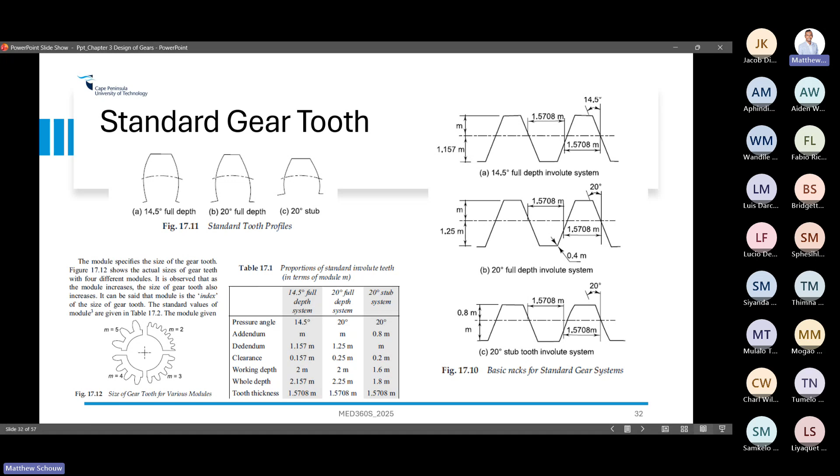And again, a way to quickly look at this from a practical sense in terms of modules - what you can see here is 4 sections of gears, for 4 different gears with 4 different modules. What you can observe is that as the module increases, the size of the tooth also increases. If you look at the equation, does that make sense? As the module increases, the amount of teeth should decrease - sorry, that's the amount of teeth. This is the size of the teeth. So if you increase the module, the size of the teeth gets less - wait, if you decrease your module, the size of the teeth would be more. So that's another way of looking at it. But the key word is module - module takes a lot into account in terms of the geometric proportions for gearing systems. Anyway, I just thought I'd quickly share this with you so it was done.

Continuing with the lecture, this is from Shigley. I think where I actually want to start is over here, let me go back. There's something called dynamic effects, and we start talking about the forces and these dynamic effects.

There are basically additional forces arising within the gear when they are meshing. These include a few things: errors in the tooth profile, the inertia of the rotating masses, the deflection of the teeth, inaccuracy in the tooth profile, and also...

What is key there as well, and I wanted to read this text, is that when a pair of gears is driven at moderate or high speed and noise is generated, it presents dynamic effects. And that's the dynamic effects I mentioned before. It says one of the earliest efforts to account for an increase in load due to velocity employed a number of gears of the same size, material, and strength. Several of these gears were tested to destruction by meshing them, loading them at zero velocity.

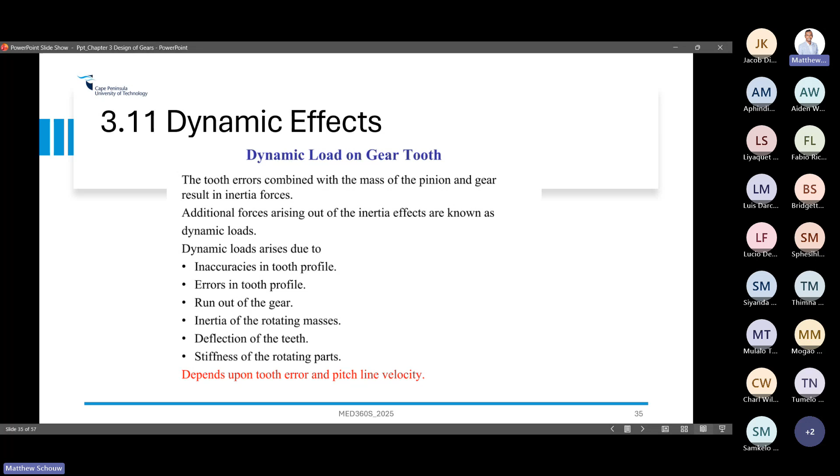So, for us to quantify these dynamic effects, all we're doing is applying some kind of additional factor based on the pitch line velocity. You notice there it's FD equals something times Ft, and there's a few for a different range of speeds.

Again, tooth inaccuracies and deflections - it's another factor which you're going to add. But it's also important, and you'll see why - we'll return to it shortly. Just remember: the tangential load times some other factor will result in some dynamic load, which we'll use as a formal assessment to determine certain things with the gear.

But let's move on. So in terms of gear tooth failure, obviously we're designing, and we need to ensure that our gear has structural integrity, right?

In terms of making sure our gear tooth doesn't fail - I mean, you might work in a company where this happens, or sometimes you're going to buy this off the shelf, but anyway, here's the awareness.

Gear teeth typically fail in two ways: one by bending failure, one by wear or surface destruction. The other one is breaking the tooth. And obviously with wear, there are a few factors involved. Do you have to know all of this? No. What's key is understanding it falls particularly into two different ways.

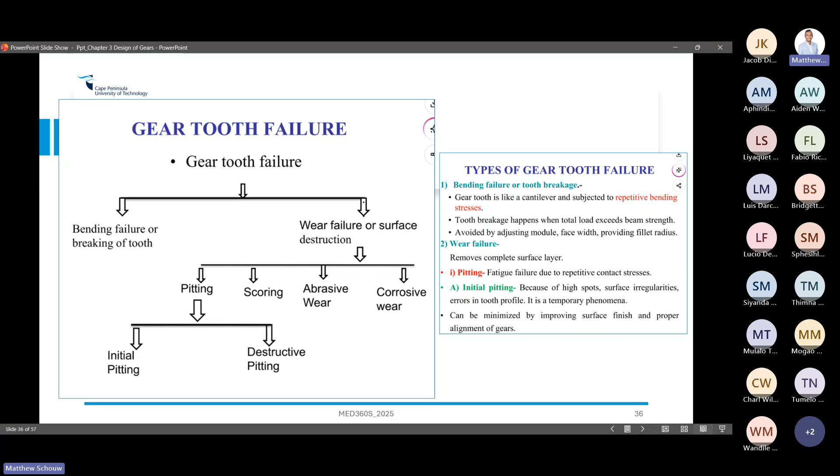So we're going to design our gear to check if bending is good and if wear is good, and I'll take you through that procedure. But let's begin with the Lewis formula.

So the Lewis formula is basically the underlying fundamental concept for this. Basically, it's applying the bending equation to a gear tooth. You can see he assumes it will be a cantilever with a force on the end, does some mathematics, and then applies some assumptions as well.

And we end up with the bending stress within the tooth equal to 6 times Ft times L divided by B times T squared. So that's the first thing - we can actually compute the bending stress within the tooth. Obviously it's all there, so we can determine whether it's going to break or not. And I'm sure you're familiar with M times Y over I - it's a strength formula in bending.

Also, with that, it's kind of okay. I'm just going off the slides of Mr. Chipangu, but what should have been shown is that from your Lewis equation, you can actually remodify this in terms of FB, and we can then call this your bending load. And then you notice that there are a few factors to look at.

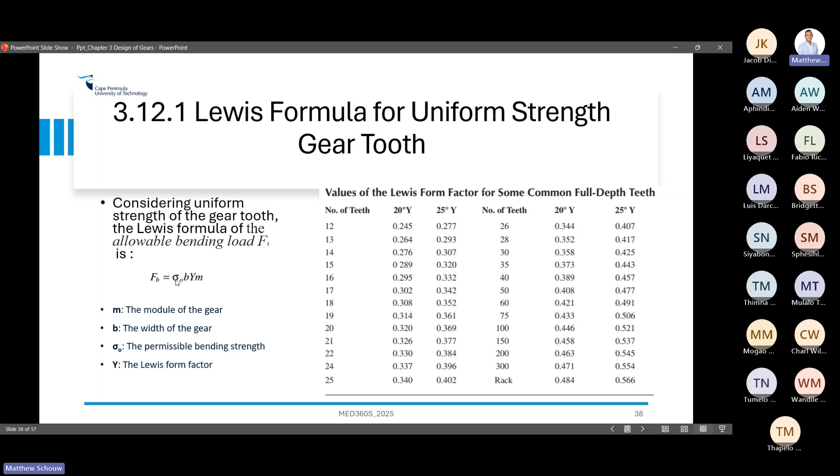When you look at your Lewis form factor, that's to do with the number of teeth and the pressure angle; this is the Y value. Whatever number of teeth you have, whatever pressure angle you have, you choose that Y form factor. Your module is your module, B is your width of the tooth. Then you've got your permissible bending strength, and that comes from this table over here.

And what's main there is that when we are looking at basic gear performance, the main criteria you're going to be using is that your dynamic load should not exceed the load capacity. So we are comparing two things: FB, as mentioned just before, and your dynamic load FD. We compare those two to determine whether the gear is suitable or not.

This also serves as the basis for something called the AGMA approach, which is like the standard for designing gears. And that's what I'd like to at least get through with spur gears. It's not tough, just a lot of stuff there. But anyway, I'll come back to that. It takes us to the next section, which is this method over here. It's basically the same, just a lot of factors we've got to use.

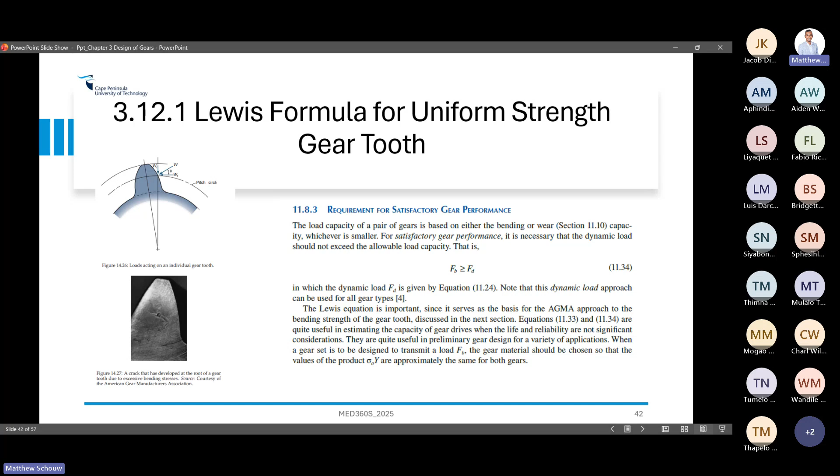But what I'm going to do after this is we're going to do Lewis, and we're going to solve this example. And then afterwards, we're going to do wear, go through this, and solve that example. That's today's agenda. After that, we will look at the AGMA method and go through that as well. But anyway, let's revert back.

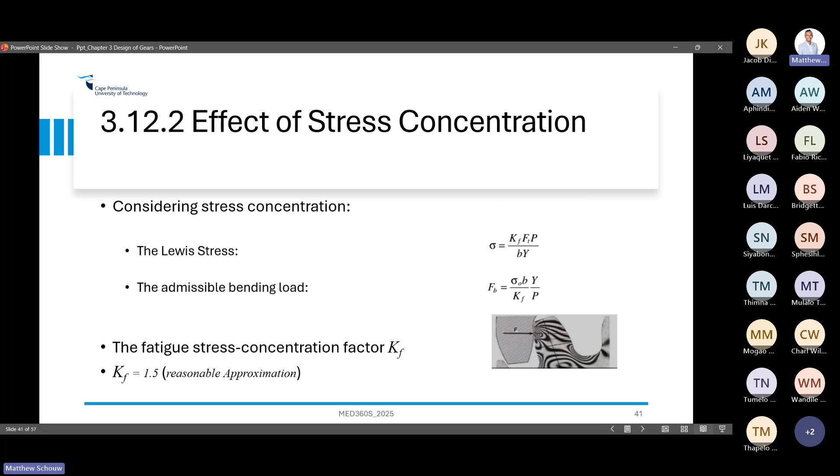So key thing here: we are looking at this here. We need to find FB, we need to find FD. But let's tackle this problem here. Is that okay? Are there any questions before I proceed? You can just say no, yes, following, before I move on.

Siyabonga, Mogao, Tumi. Okay. Cool.

Yeah, so let's begin with that example. You can follow from the textbook as well, it's in the textbook. And once I'm done, I'll show you what the exam level is. If you can do that, you'll be sorted. So it combines a bit of forces and a bit of gears. I'm just preparing the question here, and we'll begin.

Okay, let me just place it nicely. Yeah. Okay. Cool. I believe I wasn't sharing. All right, here we go.

So again, the whole purpose of this is to determine FB, and it's again related to this dynamic force. Okay.

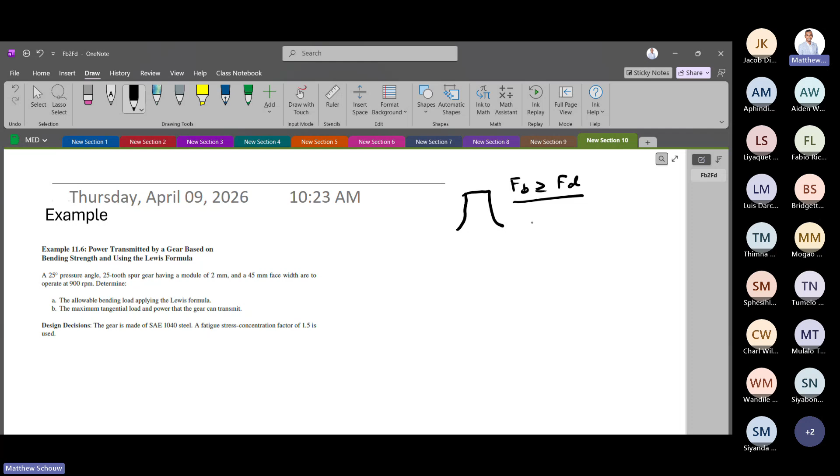Anyway, so we have a pressure angle of 25 degrees, a 25 tooth spur gear, having a module of 2 millimeters, and we have a 45 millimeter face width to operate at 900 RPM. What they want is FB, which is your bending load, and then they want the maximum tangential load and power that the gear can transmit. I'll talk about that afterwards.

The gear is made out of that steel, and it has a fatigue stress concentration factor of 1.5. Luckily, this is typically given. So let me take you through the process. The formula to begin is fairly simple. Your FB equals stress zero times B times Y times M.

I'll just make a note over here for you. Y and stress zero, the allowable bending stress, are from tables, so you're gonna have to pull that from a table. There's something I must tell you with this formula: do not worry about orders of magnitude, and you'll see what I mean. It's kind of like a direct plug and play. I've not introspected this formula 100% myself, but I trust what they're saying.

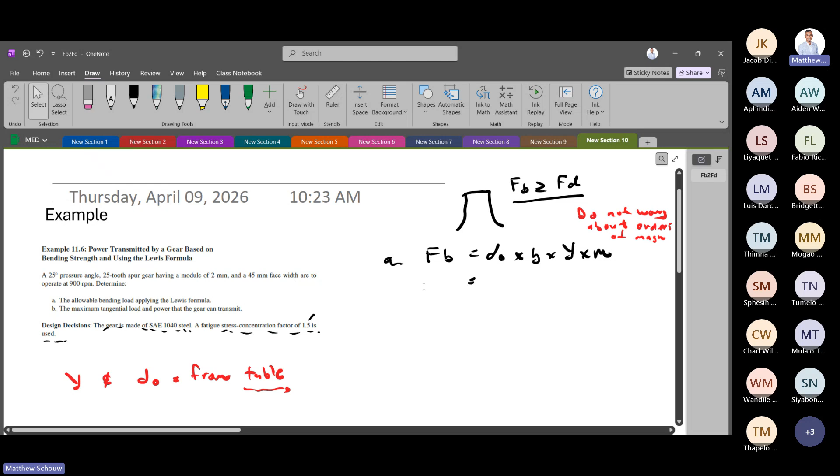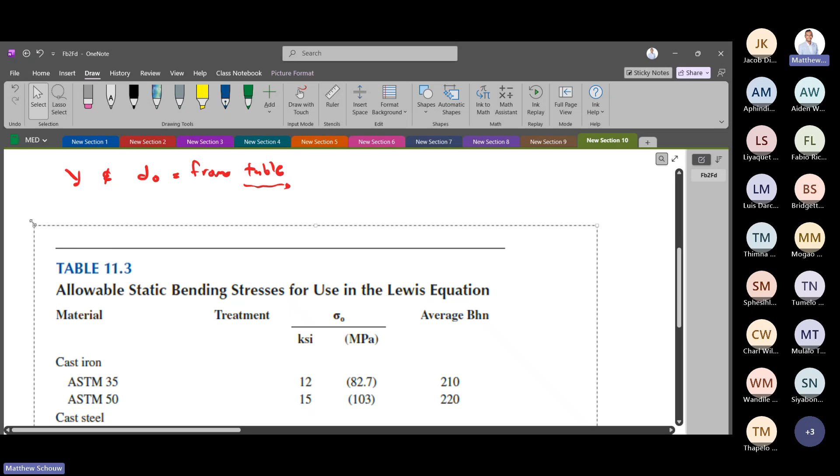So let's get our Y and our stress zero from tables. Let me provide the table for you. Let's start with stress zero, which is your allowable bending stress of the tooth. Engineering has come a long way for you to just pull a value from a table. This is table 11.3. Super simple. So can you guys determine what is my allowable static bending stress?

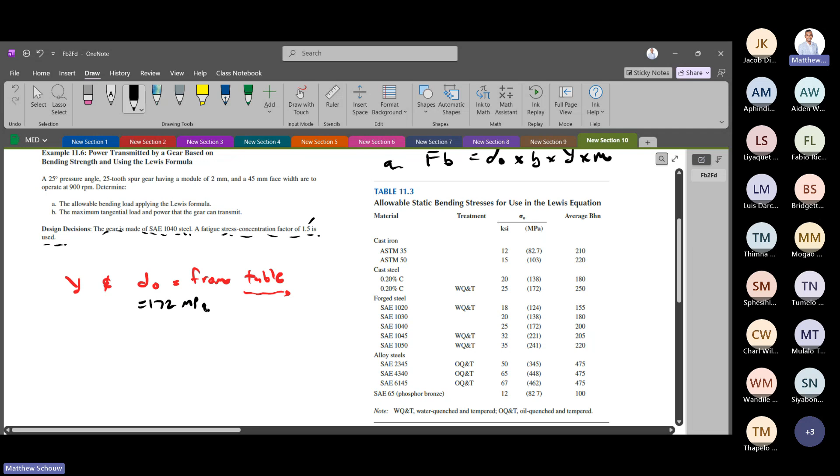We're dealing with the SAE 1040 steel. So can you choose which one over here and give my value? You can just shout out. 172 megapascals, I appreciate that. So that's going to be 172 MPa. Straightforward, right? Then we go to the next table to pull up a Y.

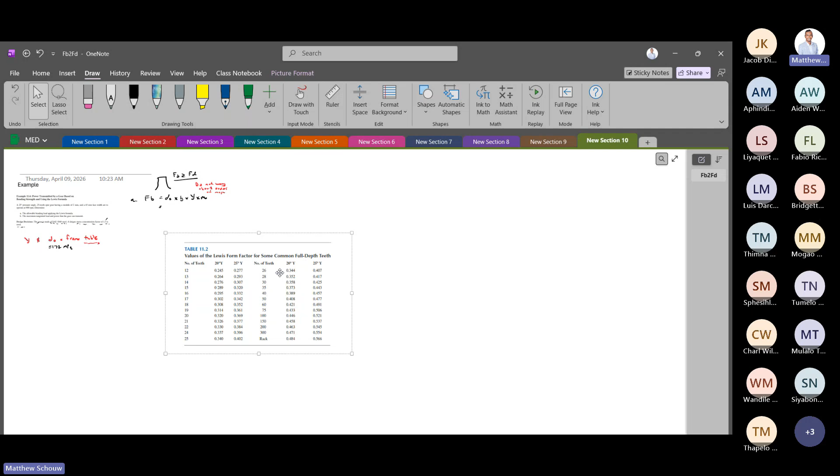This is the Lewis form factor, to do with the stress concentration thing. Just paste that over here. Okay, cool, my mouse is here. If you can see it, then you can obviously just tell me. Just want to get my notebook here. What is that value? Can someone tell me that value, please?

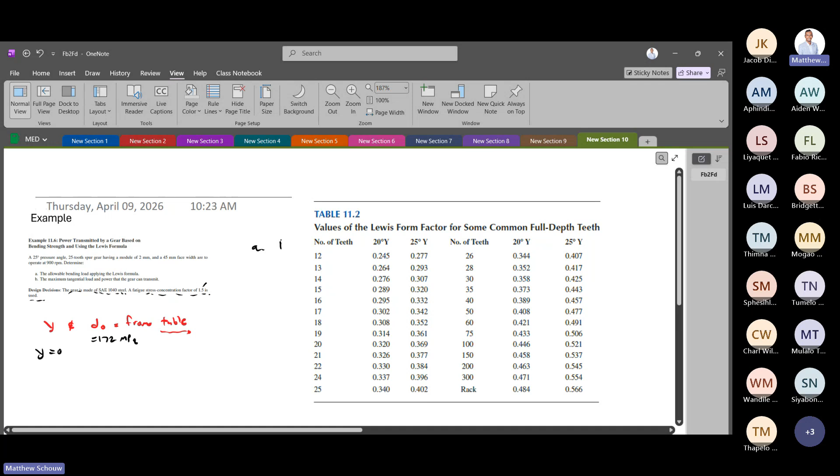I think you have to scroll down a bit. Okay, cool, 25 teeth. So we had 25 degrees, this one over here, right? I think it's 0.402. 0.402, perfect.

The one thing I need to add, which I'm realizing with this formula, is this over here. It's actually equation 11.3, for your stress concentration. So this was modified. It's the same formula, but now we have it divided by KF.

And guys, remember the P, which is your diametral pitch, is inverse to the module. So don't be overwhelmed by that. 1/P is module, or inverse. I hope everyone is with me. That's the equation we're gonna use, because we are just accounting for that stress concentration factor. So you just substitute the values.

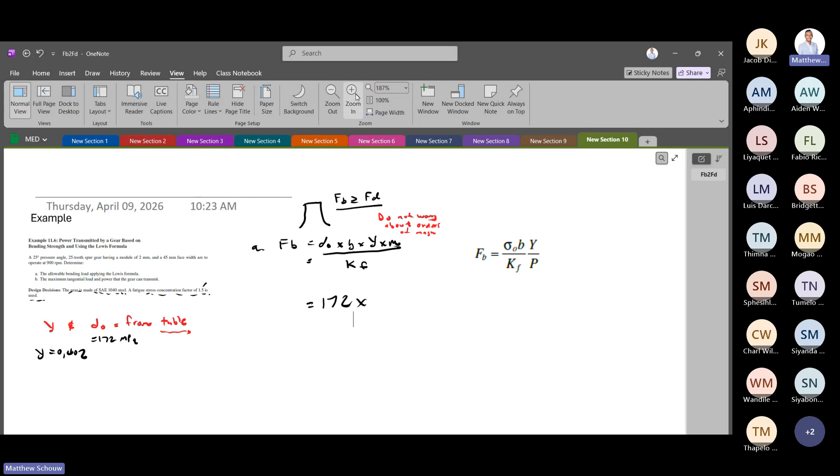You're gonna say 172, no orders of magnitude, times the width, which is 45, then Y, which was 0.402, times the module of 2, and we simply divide by the KF given of 1.5. This is typically standard, a good approximation to have.

And that's all. So no 10 to the power 6, no changing units to meters. You're just putting the values exactly like this. I'm not sure how that works, but yeah. So let's quickly get that bending force. You can just get it for me.

I got 4,148.64. Okay, Tony, you said 4,148? Oh, 4,000? 4,148. Okay. Point 64. Perfect. That's newtons, no? So that's the allowable bending load, guys. That's what it is. Okay. That's perfect. I hope everyone sees it's as straightforward as this.

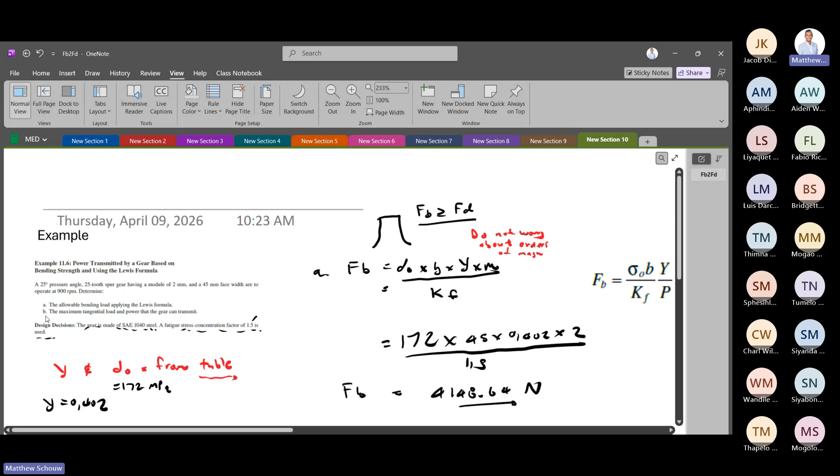So remember now we've got A, and now we need B, which is the maximum tangential load and power that the gear can transmit. So that's B. So we need FT. Now, unfortunately, we don't have a meshing system where we can find FT depending on the way it's rotating and our radial load. We have none of that information here, okay?

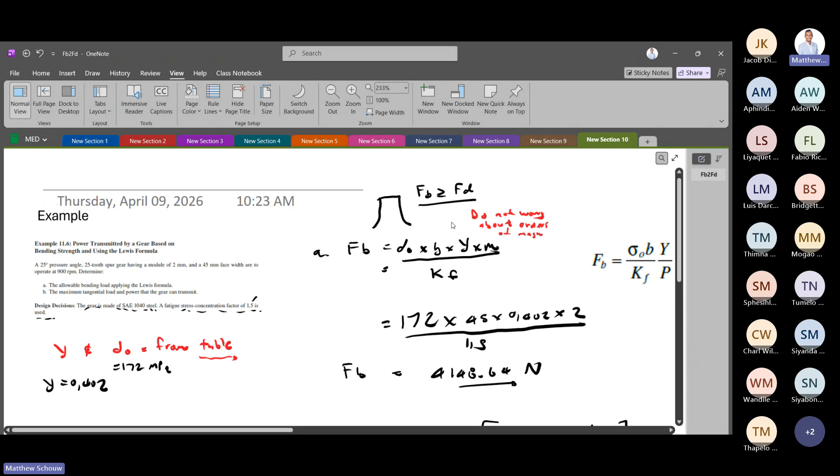So what they're saying in this particular question is that they're making FB and FD equal, right? Because this is the limiting value. So what it basically means is that that's like the max value that FT could be anyway. Well, not the max, the minimum value, because FB can be way greater than FT. So all we have to do is set FB equal to FD. But now let's find FD, right?

So FD is equal to, and like I said, this is very important, your dynamic load or effect all depends on your pitch line velocity and your tangential load, right? Obviously, other factors. Let me just go to my slides. You need to first find the velocity. And then based on your velocity, you have to choose the right equation. So the first thing to do before we do FD is find V, okay? So let me erase my FD and let's find our V first.

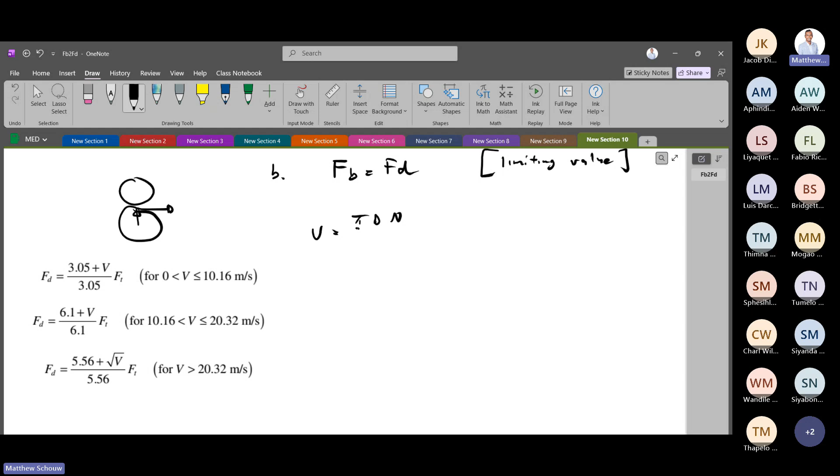Again, the procedures don't change for this thing. Straightforward. So V will be pi D n over 60. Colleagues, we have n, how do we find D? Who can tell me? What's the main value for gears? I mentioned it at the start of the lecture. The main geometric thing. How do we find D? We use m, the module, which is your diameter divided by number of teeth. Always remember that one. Very important. So let's quickly find D using this.

So you have the teeth number, and I believe you have the module as well. You guys can tell me what D is. Isn't it 50? Yeah, it's 50 exactly, nothing more, nothing less. It's 2 times 25. Once that is done, we say pi times 0.05, and our speed was 900 revs per minute, and you divide that by 60. And then you get...

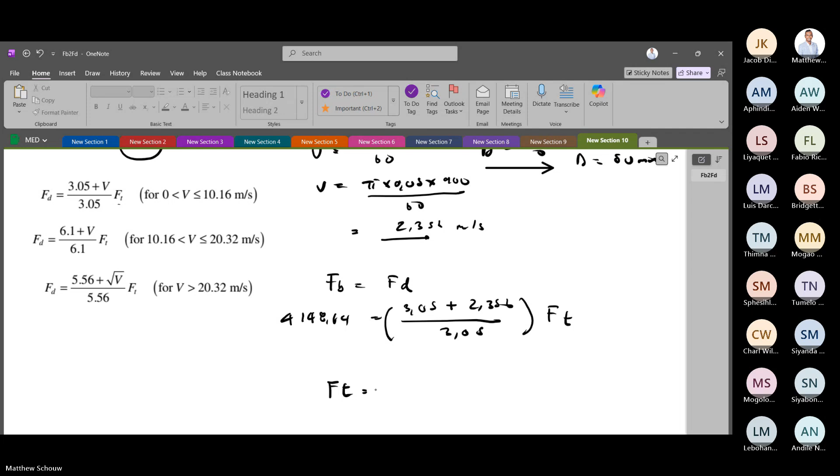Power should also be easy. Yeah. I got 2,340. Okay, just give me a second. You said 2,000? 340. 340, that's fine. 613. 613, no? Okay.

Once that is done, power, like we all know, should be Ft times V. And we can find that minimum power based on that force. So yeah, that's basically it. It's not too much, really. It's 5.51 kilowatts. Thank you, man. 5.51 kilowatts. So here we just established how much power that gear can transmit.

Which is amazing. So again, this is very, very specialized gear design. It's not a common thing anymore. Okay, so we've done that. I believe there's no questions. If there's any questions, ask, then we can move on quickly to the wear part. Any questions, guys, with this one?

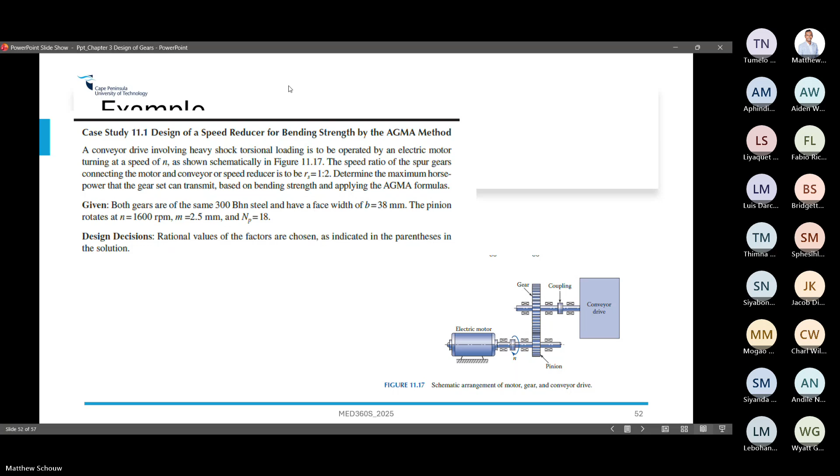Okay, let me come over here. Okay, cool. So let me just share my slides again. And now we're going to make a new section. We're going to move on to wear. So I'm obviously doing it a bit different from the book, but you understand it kind of flows better like this. I'm assuming you guys can see my slides. And we will come to it now.

So in this case, we're looking at something called wear, and instead of the Lewis formula, we're looking at the Buckingham formula, right? And what you're looking at when we design the gear is basically surface failure of the gear, one of the other modes of failure which you're checking for. And what is important over here is the following.

The wear load would be equal to your pitch diameter times your width times something called Q, and then something called K. Once you have that, you then compare Fw to Fd again, just like we did before. So it's exactly the same type of thinking as the previous one, but now I'm just looking for wear. Cool. So how do we get this value?

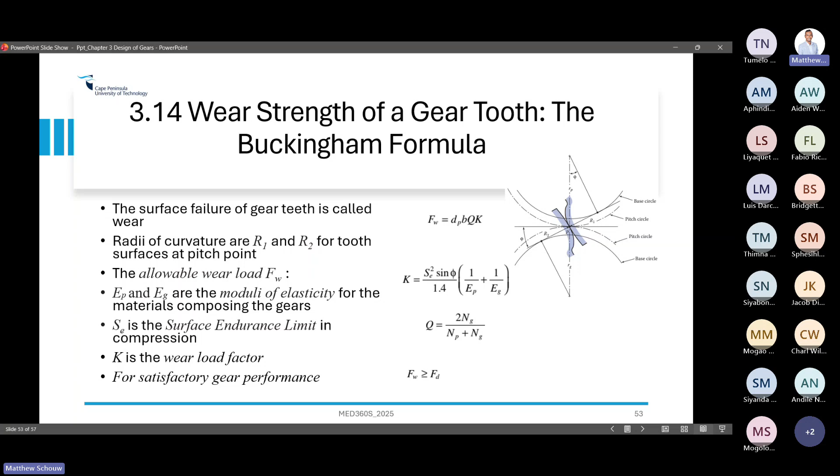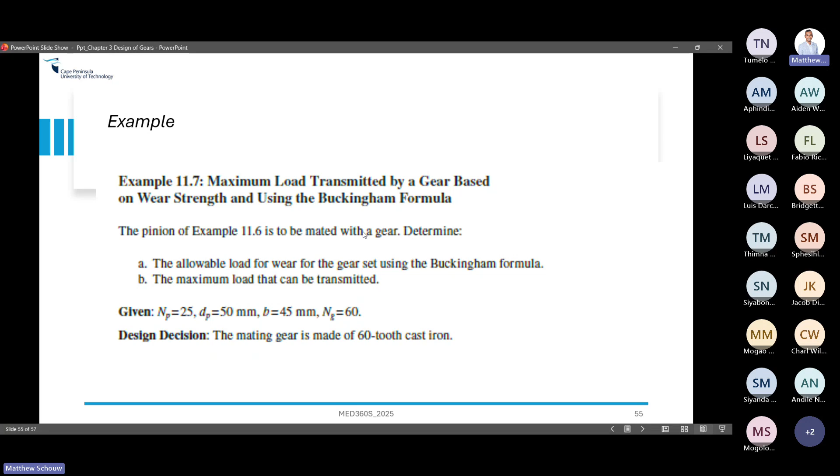What we're going to do now is check on that pinion in the previous example. We're going to do the allowable wear load using the Buckingham formula, and then we're also going to do the maximum load transmitted. So we do exactly the same as before, just for this now. Cool. So I'm going to go to OneNote again, and we're going to solve this one as well.

I hope everyone's following. What we're doing is just checking for wear and bending. It's just a lot of tables to pull from. Okay, cool. So here we are. We've got the previous one, and we now have to check for wear. Let me get the formula for you as well, so you can actually see it. I'm just going to copy it and paste it over here.

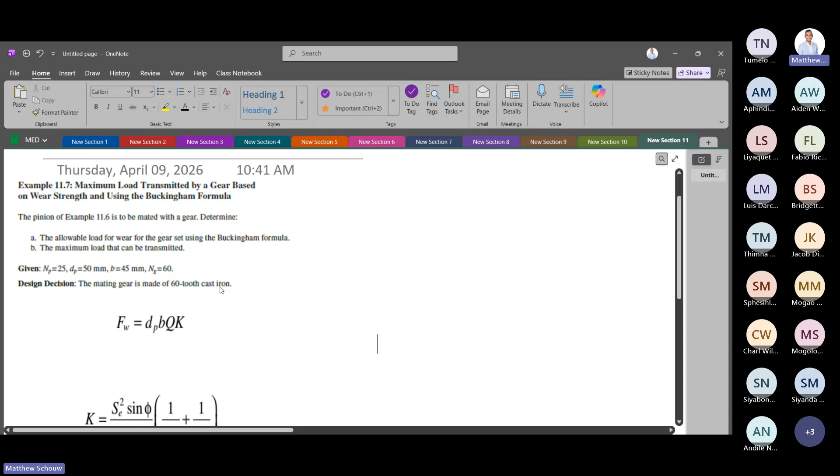So you can see it gives you Dp, which is the pinion. We have to check the pinion. And there's also a design decision for the mating gear: it's a 60-tooth cast iron. So obviously that is important. All right, so let's quickly try and solve this one. Fw, my wear load, equals Dp times b times Q and then K.

K is the only value we need to get from the table. Let me write that down for you. K from table, Q is equal to that over there. I believe everything is given to us. We have our diameter of pinion, we have our breadth of 45. We need to find Q and we need to find K.

Let's quickly compute Q using this formula over here. Let me write it down: Q is equal to 2Ng over NP plus Ng. Let's quickly get Q. It's some factor which I'm not sure about, man. I need to look at Shigley to give you a proper answer. Can I just get the Q value?

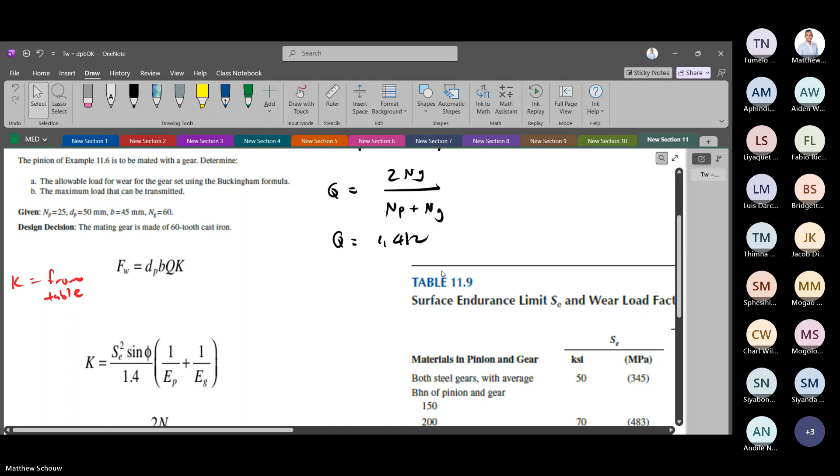is our form, the wear factor K, from the table. I'm just going to get it for you so you can see. Pressure angles, all of that's important here. So the 1.412, write that down properly. It's not tough, man. Never mind, just make it small. There's a lot, something different in this gear design from what I remembered, but anyway.

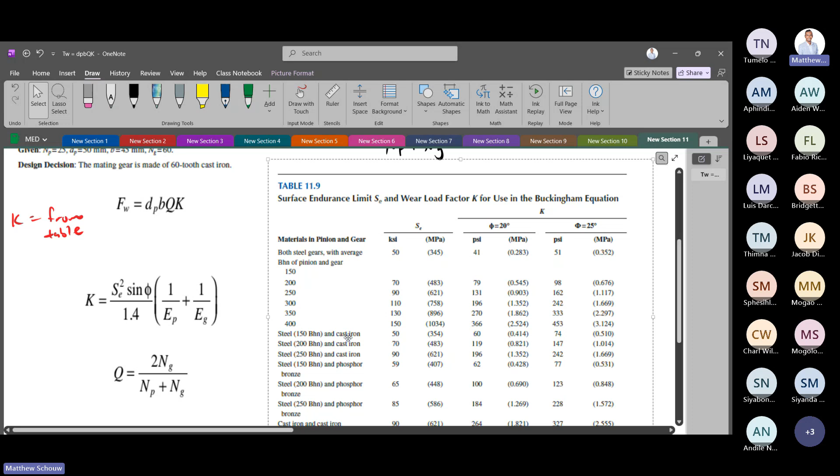So let's quickly have a look. K is from the table, and we are looking at a 60-tooth cast iron gear. Cast iron. So if you look at this, it's both the materials in the pinion and the gear. So what I'm understanding is what was a pinion and what was a gear? Let's have a look, colleagues. Let's remember now, pinion was SAE 1040 steel, okay, that's not there.

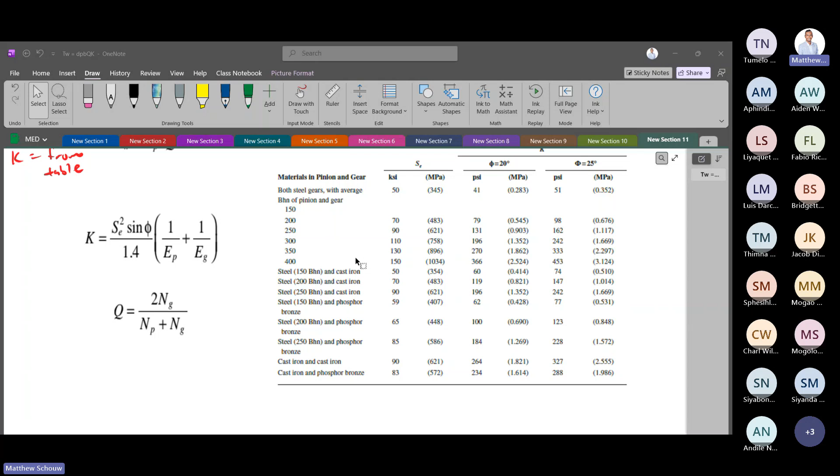But what was its hardness? What's SAE 1040 steel, guys? Let me have a look. I guess we need both, it kind of makes sense. I'm looking for the hardness. The hardness for that steel was 200. So SAE 1040 steel was 200.

So for pinion, it was 200 Brinell hardness. Not sure if you guys have ever done a hardness test before. I'm just going to show you now so you can see what I mean. Make a note that you're checking for both materials over here. I didn't want to mention it before, but I thought I'll show you now. So SAE 1040, the value there, average Brinell hardness of 200, can you see there?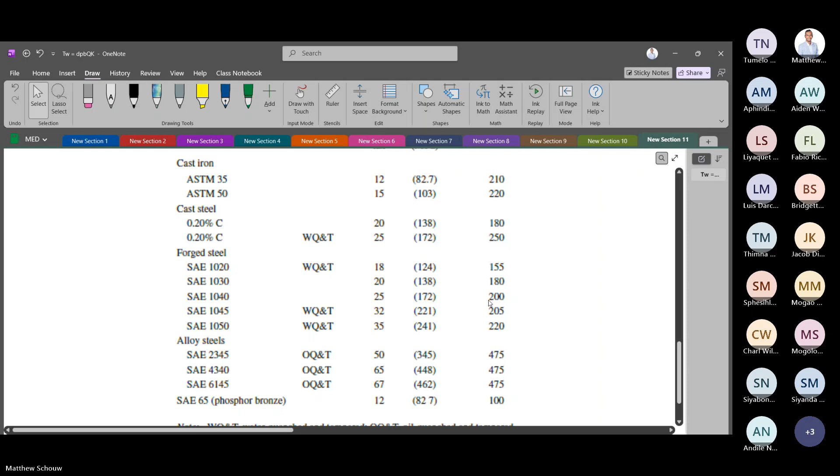Cool, so if that's the case, your steel is 200 and our gear was cast iron, right? And if that's the case, we can say our K factor for a 25-degree, can you guys see it there? Is 1.04, yeah, 1.014. Are you guys with me? If not, please tell me.

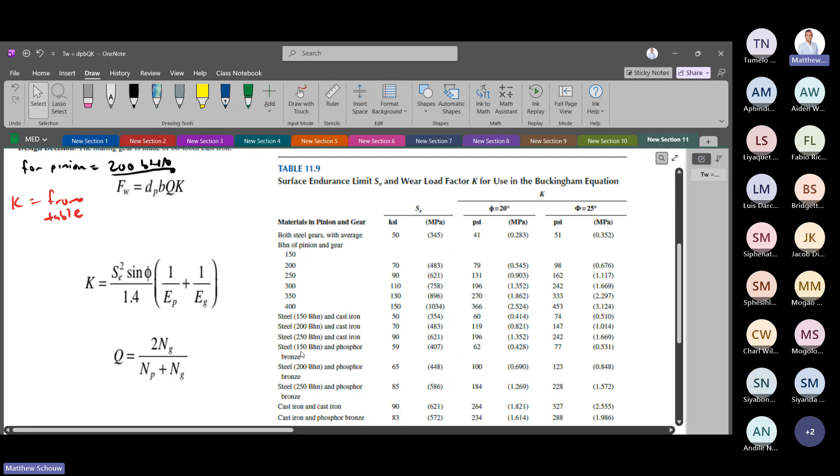Can you guys see it? Yes sir, yes sir. Perfect, okay. So just remember, we're looking at both pinion and gear, right? That's what's key over there. So in that case, K was 1.014. That's nice. All we do now, guys, is plug in our stuff.

Straightforward, DP was given as 50. And again, with these formulas, there's no orders of magnitude, we're just plugging values straight away. 50 times B, the width was 45, times Q, which was given as 1.412, times K, which is 1.014. Let's get our answer: 3,221.478.

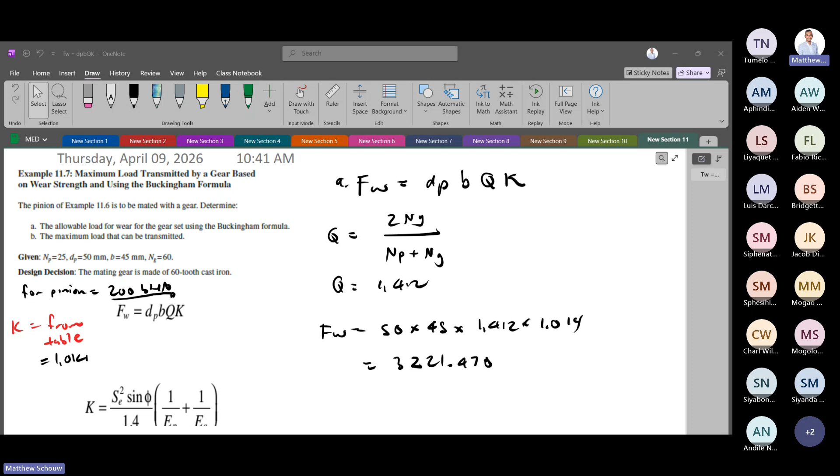And again, the maximum load that can be transmitted is exactly as before. All we have to do is exactly as before, right? And if you recall, we have a condition of FW must be equal to or greater than FD, because it's the same gearing set. We've got the pitch line velocity already.

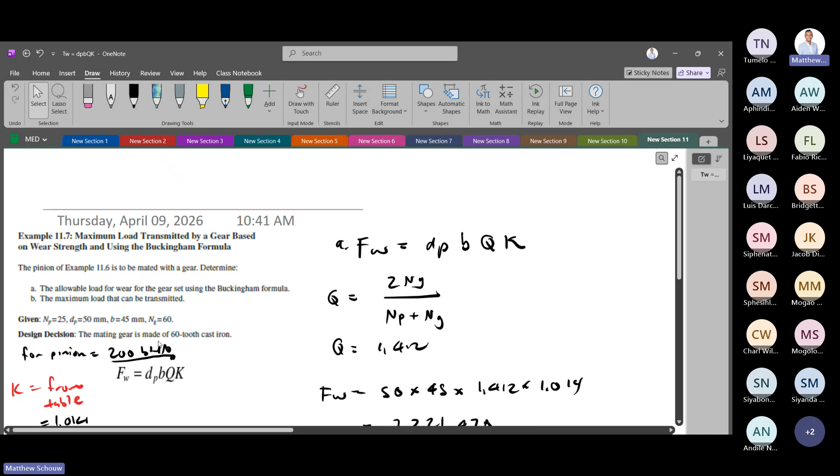We apply exactly the same setup over here. So we're going to say the same thing, but the only difference is FW is over there. So now we're going to take this part and add it there. It's going to have 3,221.478. We're making that equal to 3.05 plus, what was it now again? 2.356. Divide that by 3.05, and we're going to have to solve for FT. That'll be our maximum load that can be transmitted. Okay, let's quickly do that and see what you get.

Okay, I'll just park it here for a second. Is everyone following? I give 2 minutes for digestion. It's not tough, just some equations and stuff one must follow. Is there any questions? No, sir. Okay, I think that's straightforward, no?

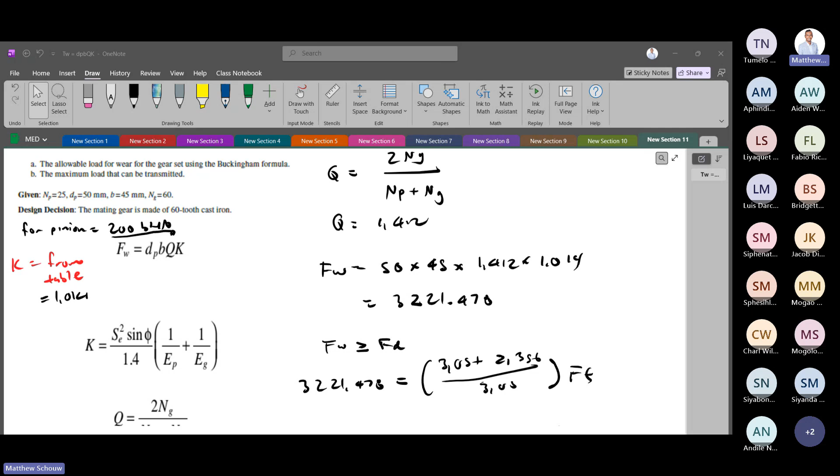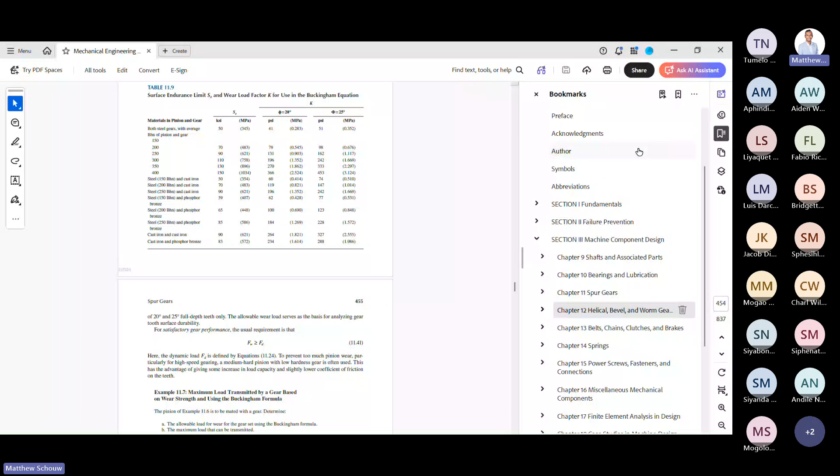So what I want to do next is the following. Let me just go to the textbook first. So guys, what I want you to be practicing is this, and I'm being very direct with this. I'm just going to the textbook quickly so you can see.

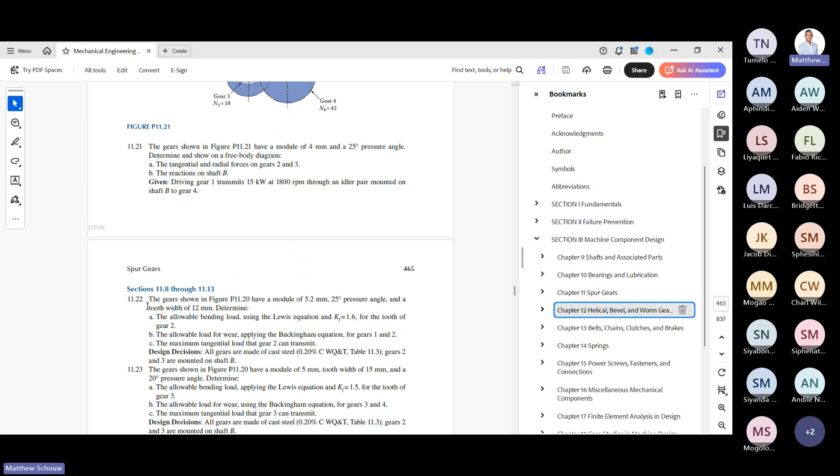Now there are two approaches of utmost importance. You'll notice a lot of them are presented here, but let me explain how you must tackle this. So you see all these gear sets here, with the standard stuff of the forces, tangential, radial forces, the reactions on the shaft. If you look at sections 11.8 to 13, that's what we're doing. For the gear sets 11.20, this figure here.

They want you to now find the allowable bending load using the Lewis equation, assuming Kf to be 1.6. Find the allowable load for wear applying the Buckingham formula, which you just did for gears 1 and 2. Then find the maximum tangential load that gear 2 can transmit. Can you see how they incorporate both of these? Can you guys see that?

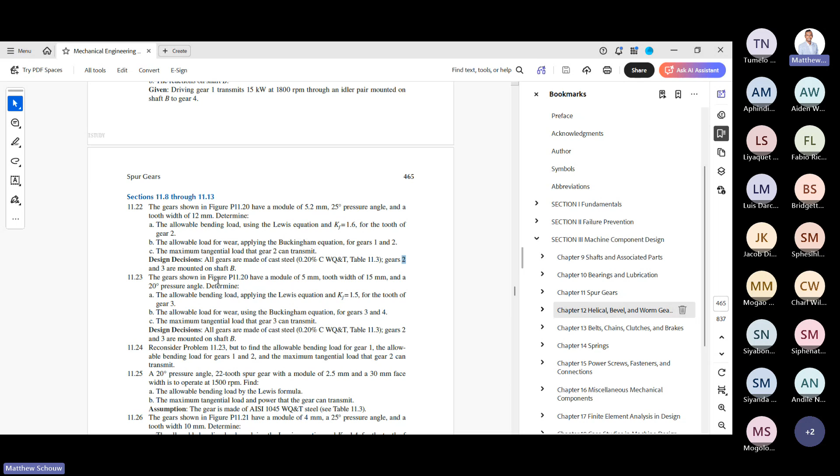11.23 gives you the same thing, but now they just change the values. Can you see there? But now they choose gears 3 and 4. What I'm trying to say is that if you go over all of these, surely you'll be sorted for the up and coming final.

Then there's a slight modification, and that's coming with the AGMA method. Is everyone with me on how this works? Can you see how to tackle the problems? Yes or no? Yes, sir. Yeah, so it's not tough.

So when you're expecting a question, it's going to be done like in one big bulk section. Even though the tutorial I'm giving took one of these, be conscious that's how it's going to be. You do the forces, and then from the forces there'll be an add-on for this part. That's just my advice to make sure you're on the right track. It's not tough, it's simple equations. Just got to know what is what and things like that.

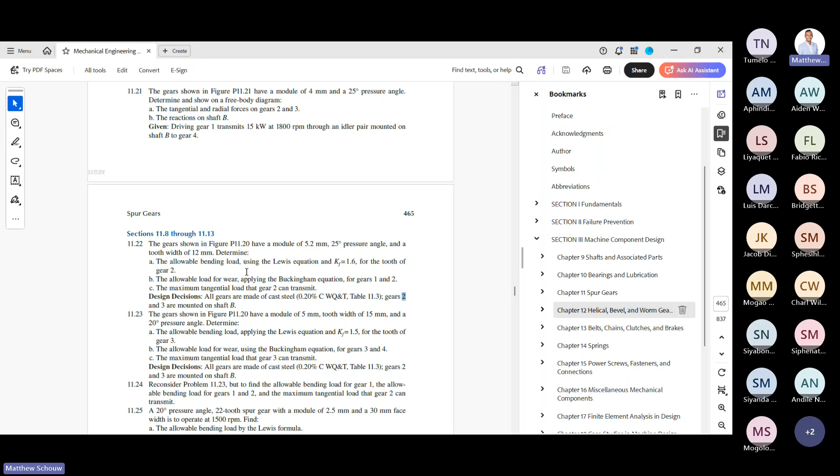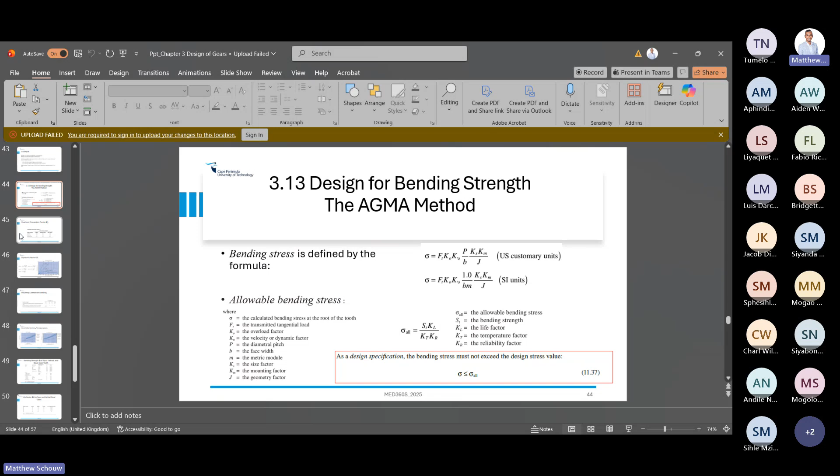But okay, let's quickly move on. We're not done yet, unfortunately. Now the next piece is the following. Okay, let me open up a slide and just find this one now, and I can just write this down.

So we talked about gear design, and we've established the failure bending, and there's another one. Obviously there's the Lewis formula, and then you have the Buckingham formula, which we've just done. So both these methods come into something called American Gear Manufacturers Association. These are like the international standard approaches for designing gears.

So what we're going to be looking at, I think I'll try to do bending. So basically the Lewis and the Buckingham form like the foundation for them. You'll notice it's similar thinking when you're doing helical or bevel. I think by next week we'll do helical. So I'm just letting you know, but it's the same.

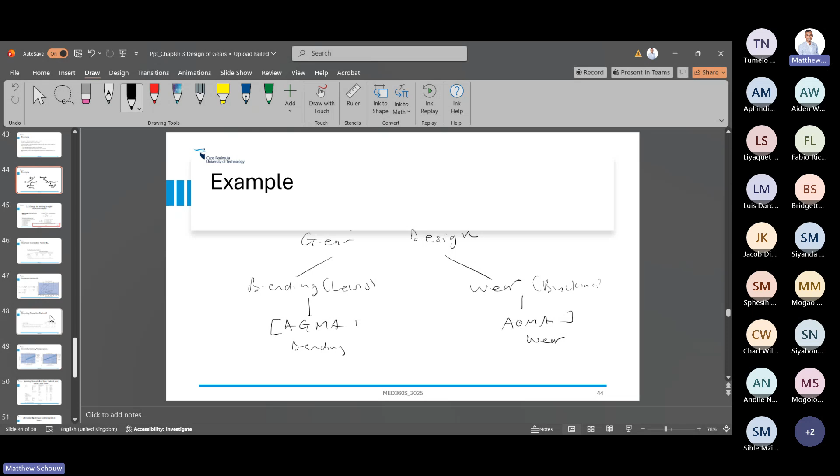So let's go over this AGMA method so you can actually see what I'm talking about. Okay, where am I? Okay, yeah. So designing for bending is the AGMA method. And guys, again, long story short, it's a formula with a lot of factors. So we've got this formula over here.

Which will be the so-called bending stress, or the design stress from the gear. And then we have the allowable stress, which is this one. What is key here is comparing the two. So as a design specification, the bending stress we find within our gear, nearly the same as the previous one, must not exceed the allowable stress, which is based on that value. So all it is here is finding those two values and making a comparison. That's it. So what are all these factors?

Let me quickly, don't talk too much about it. I think we should just solve and then kind of populate accordingly. But I do want to mention to you, like how these factors, if you group these factors over here, so these ones, those ones, and those ones.

Let me actually do it like this instead. So this here is all to do with the load and each respective factors. Let me keep it, I'll come over here.

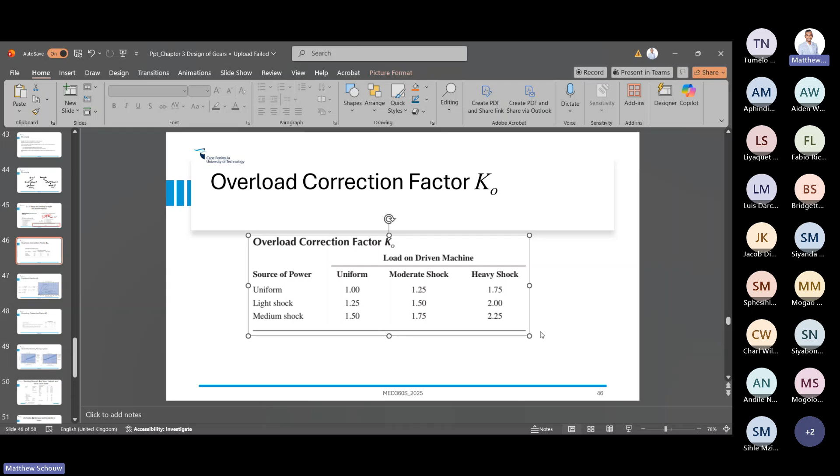This is again to do with whether it's uniform, light shock or medium shock. We have to adjust there, put in a factor there. Again, I'm not sure exactly where these factors come from, I just established somehow - I believe it's left to some kind of testing.

Our dynamic factor in this case is a bit more tricky - it's exactly what we had before. We have a pitch line velocity, and depending on how the gear looks, you're going to have to obtain a dynamic factor. But depending on which curve you have, we have these nice formulas which can assist us with the dynamic factor.

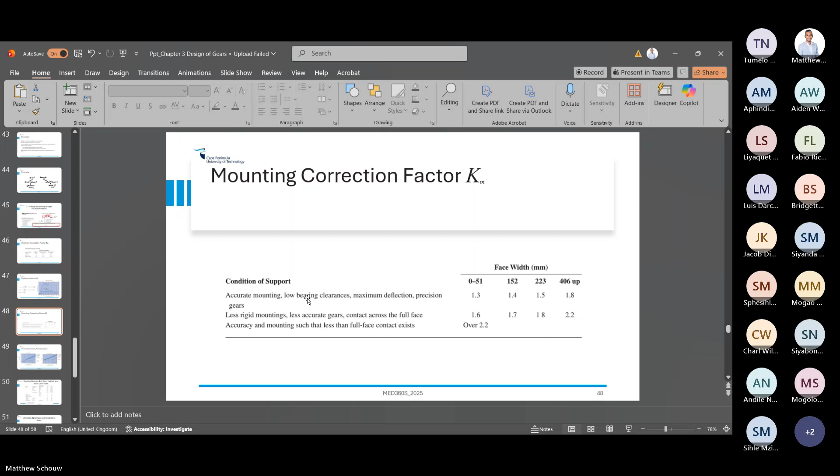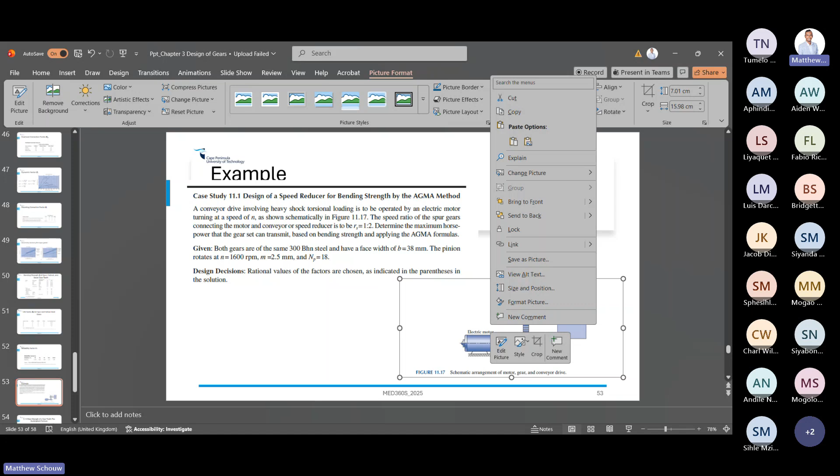So again, all we're going to do now is tackle this example - it's a case study using this. What I'd like you guys to do is, I'll show you the textbook now. Quickly go over here. Let's just go over to 11 point, where's my AGMA?

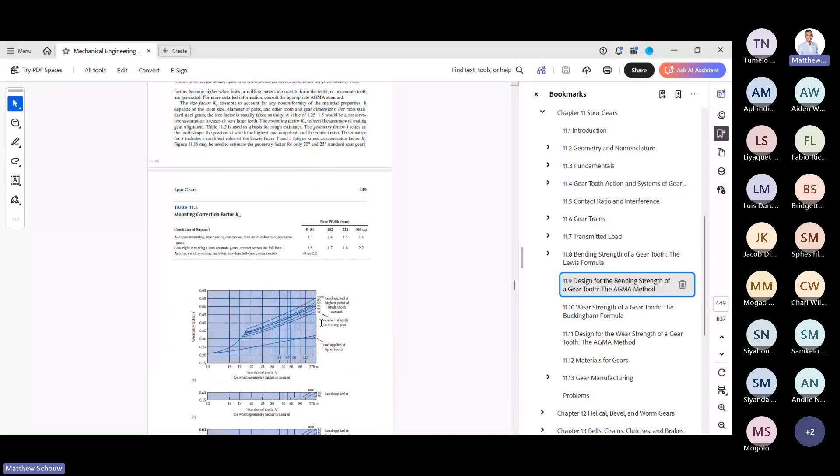So you can see here your AGMA method. There's a nice case study over here which I'll try to quickly do today, which is this one. Go over this, right? And you'll notice also there's another one as well, and there's also another case study for that, which is just over here. Okay, so I'll probably go over this one now, the bending, and you guys can go over both the bending and the wear.

So I mean, I need to go into helical gears, but it's not tough. So let's quickly try and do the AGMA method now. Okay, so it's a lot, but it's not too bad - just gotta know where. And I like this question because it's a decent case study.

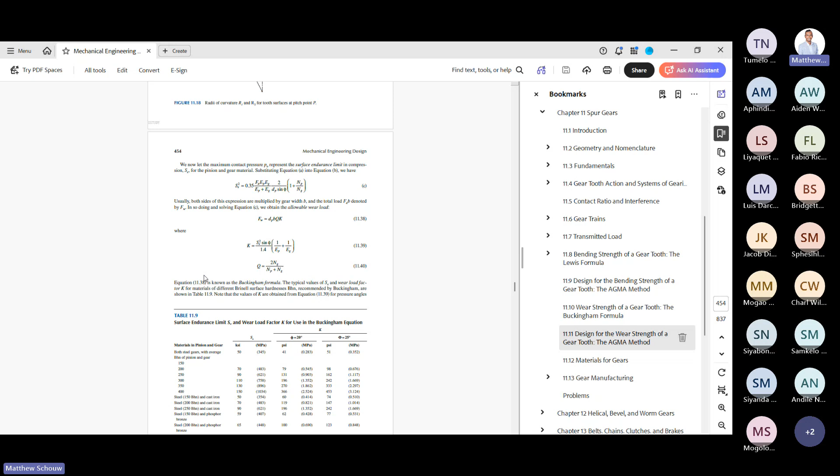And again, this is the same approach they use. If you look at your project, it's exactly the same when they design the gear systems - how they actually... I think next, if the ones aren't going to make it this time around, I'll probably do a gating system next year when I teach the subject. Okay, cool, so let's quickly do this.

So you have a conveyor drive involving heavy shock torsional loading, to be operated by an electric motor turning at an RPM so much. Speed ratio of the spur gears connecting the motor and the conveyor speed reducers to be 1.2. Determine the maximum horsepower that the gear can transmit based on bending strength and applying the AGMA method - that's your keyword over here.

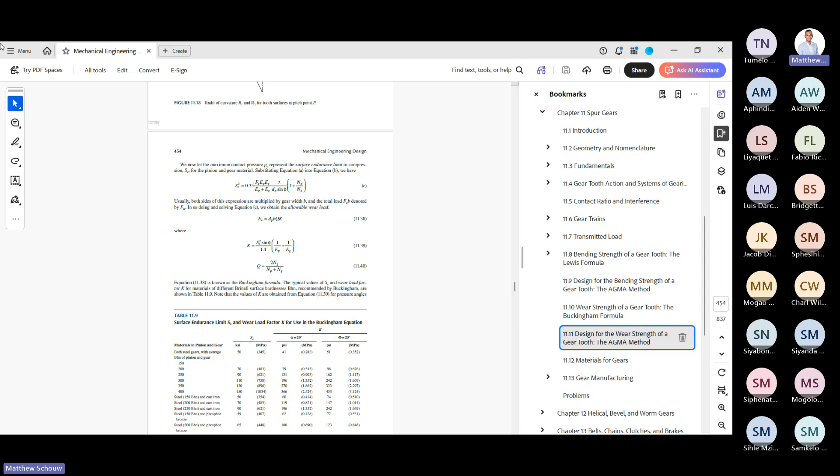Okay, so on the maximum horsepower, and they want it based on the AGMA. Okay, so what I'll do is just pull that equation so you can actually just see it again, and I'm just going to populate them, right?

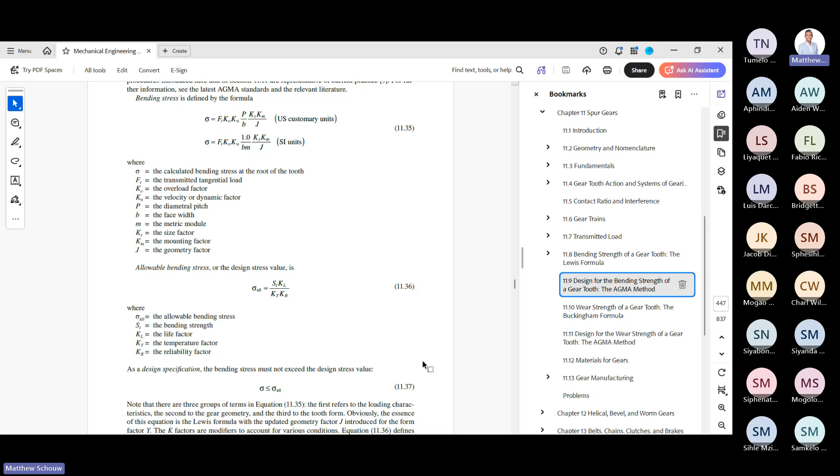So that consequently means we need to find our allowable stress first, and based on that we're going to make them equal to each other. So what I'm saying is we're going to make the allowable stress equal to the bending stress found, and then solve for FT. So we need to find the allowable, and all the other stuff, then make it equal. Then we find FT, and once we have FT we can find all the other stuff. So let's quickly see.

Let's try to find, I'm just going to go with the textbook, our allowable stress quickly. We'll start there. So your allowable is equal to ST times KL, KT, KR, reliability temperature factor, and your life factor. So let's see what we can get.

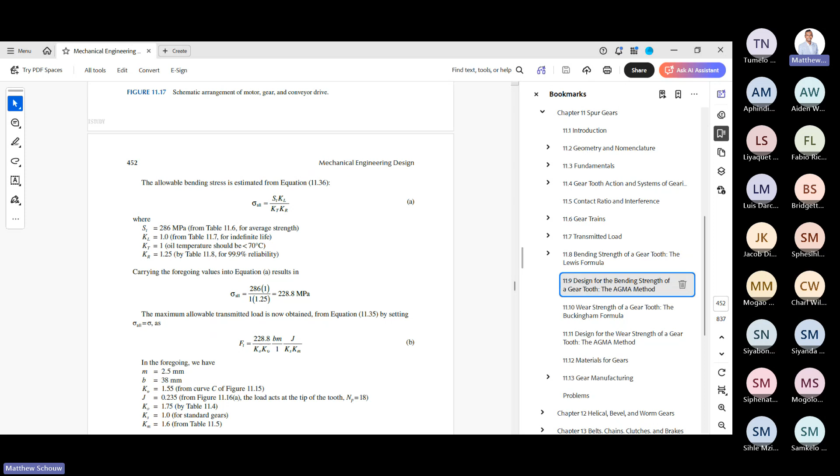Both gears are made of 300 Brinell steel, and let's see us getting all these factors. So what I'm going to do, I am going to get each table out so we can actually see. Yeah. Okay. Let me just go back to this first one. And again, these tables are provided for you, man, so don't feel overwhelmed. Just make sure you understand your approach and from which table it comes from.

Okay, let's quickly see here. For this one, we are dealing with 300 Brinell steel, right? So where is that? It's probably quench and tempered, I'm assuming.

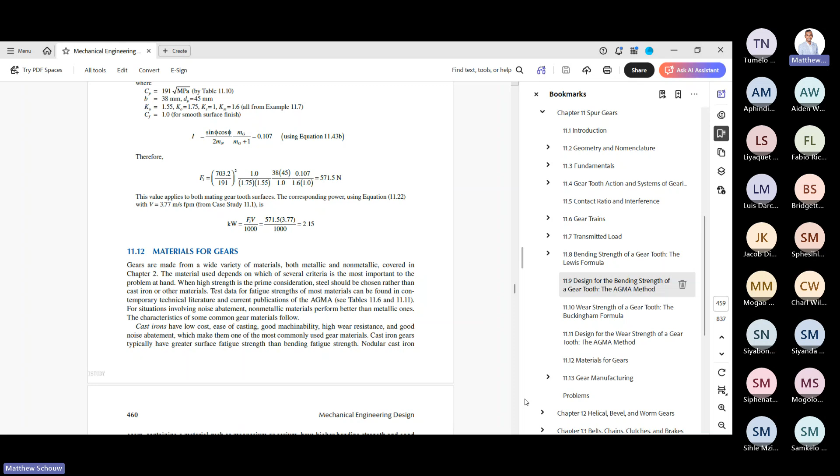And you guys agree with sir? Yes. You're not hearing, sir. What am I sharing? You're still on the book. Okay, sorry about that, guys. Yeah, thanks. Let me just... yeah, so I'm just getting back.

So what I was saying, guys, is that that's my bending stress, that's my allowable. And what you're probably going to do, since we're solving for FT, is make the allowable equal to the bending stress. So what I'm doing now is computing the allowable.

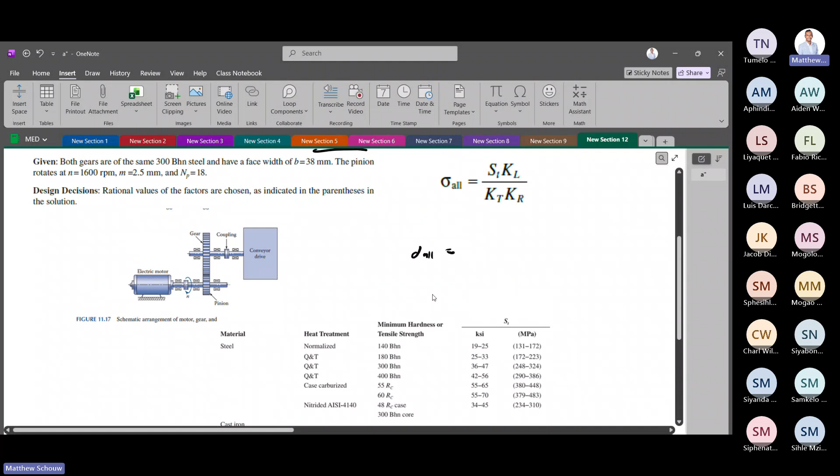So what I'm looking for, we have 300 Brinell steel, right? And we need to now obviously get KL, KT, KR. Okay. So do you guys agree with me that it's in between the range of 248 and 324? Are we happy with that?

Yes, we all see that, sir. So what you then do, instead of taking those values, is find the average of them. Is that fine? You can do that. I think, yeah. We could have also chosen the highest one, that is also kind of acceptable. But just get the average for me of those values quickly and see what you get.

Just to make sure I'm doing the right thing here. What's your average value for that one?

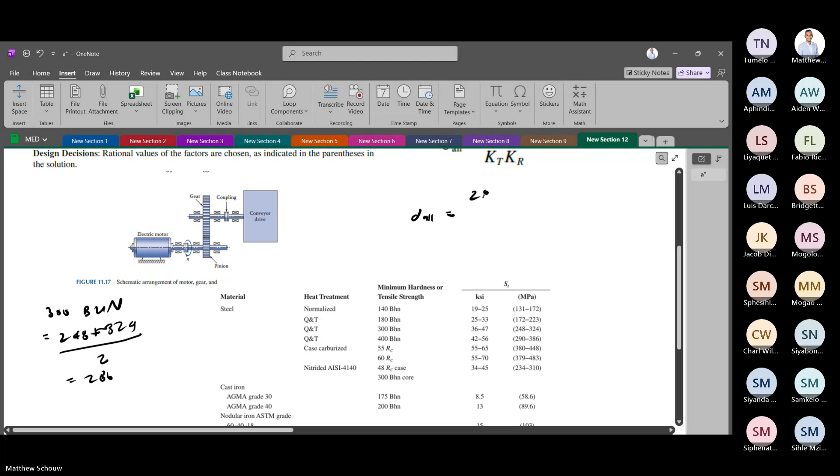I got 286, colleagues. So I'm just going to make a note here: 300 Brinell, and then 248 plus 324, divided by 2, and I think I got 286. That's 286, right? So you put that there. Are we all happy with what I've done?

Okay, we're just assuming an average value. We could have chosen, normally when I chose the lowest value, you know what I mean, 248. Colleagues over here, nearly done, nearly done. Sir. Yes, sir. Yes. Okay, thanks, Bridget.

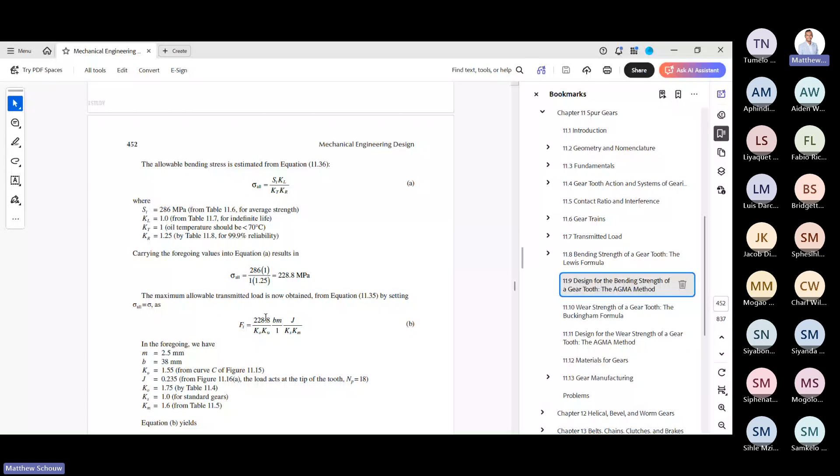Once that is done, we need to find this KL, KT, and KR, right? So what I'm going to do now is share the textbook, and I want us to quickly get the values from there, instead of me moving back and forth. So I'll show you exactly what it looks like, so this is where we can actually discuss.

So here's my KR, that's my KL, and here we're talking about our KT. So let's just quickly look here. So I'll mention the temperature factor just quickly, and you'll notice the temperature factor, I'll just have it over here, is applied just for the allowable stress for the effects of operating temperatures. We have done stuff like this similar before in fatigue.

And they say for temperatures less than 71 degrees, KT of 1 is used. If it's greater, we then have to adjust. This is for the lubricant temperatures, and in our case they have not stipulated anything. So we're assuming it's going to be operating at less than 71 degrees, like a normal environment, or the lubrication is in a normal environment. So therefore, our KT is 1. So just make sure you write that down. I'm writing it down here.

After KT, we need to find our KL, which is our life factor. Our life factor is given over here, and based on this, they talk about the amount of cycles. I'm not sure they stipulated the amount of cycles, and it's all dependent on the hardness. So obviously they should have stipulated the amount of cycles; we could have possibly interpolated. Can you guys see that for this one? Okay, I'll just pause for now and check what they did.

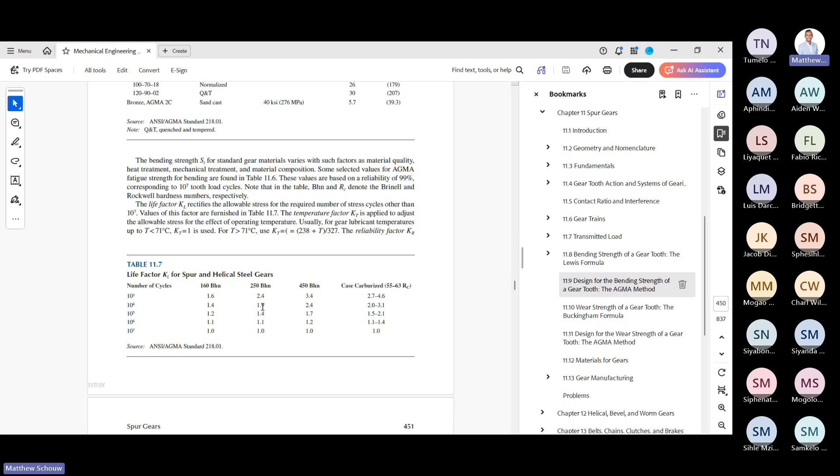So then we have our reliability factor, and the question stated... Oh, here's the question. Let's have a look. I think they assumed values. Let me just check. 286. They said one for indefinite life, and was our reliability given? No. So they've also assumed a very high reliability. In this case, they chose 99.9, so it's 1.25. Typically in a question, it will be stipulated, right? If not stipulated, it's a case of just substantiating what you chose. Yeah.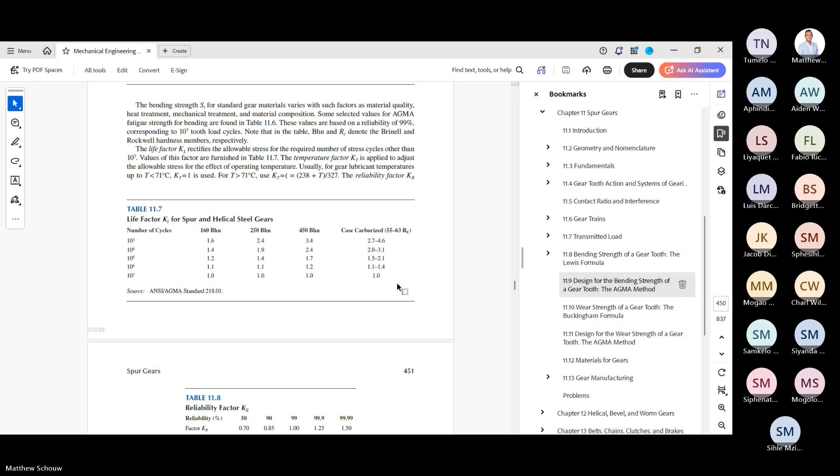All right, guys, are we all there? Let's quickly revert back. For the life factor, like I said, it depends on your hardness. But in this case, let's say it's indefinite life, so 10 to the power 7, you're just going to go with a 1. So I'll use 1. In this case, it didn't specify, so we're just going to specify ourselves. But normally, they'll tell you it's this, it's that.

So coming back to my OneNote, as I have there, my KL was 1, for indefinite life. Our temperature factor was also 1, less than 71 degrees. And then the KR is 1.25, that's the reliability factor. Can someone just get me my allowable stress? Should be a quick and easy one. 228.8.

Guys, are there any questions? Anything unclear? Aiden, Bridget, Fabio, Morgan. It's 228.8. Can we just get that? How much? Bridget? 228.8. Like this. I think that's what you said. That'll be in megapascals. Okay, that's perfect.

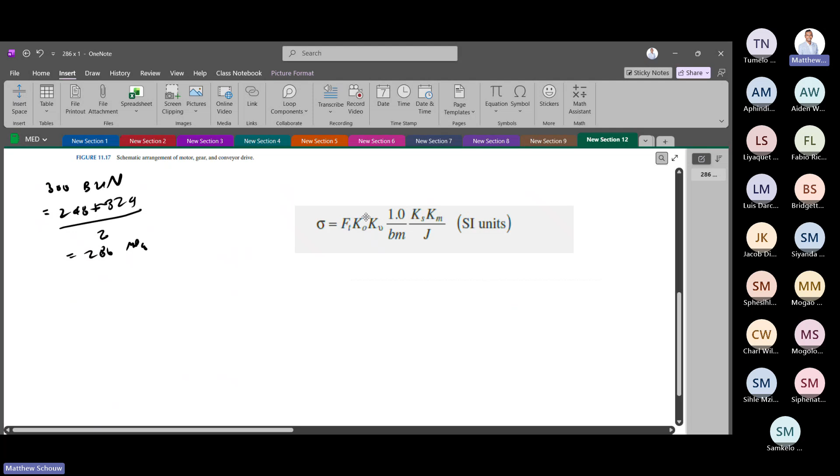So once that is done, the next step is to do a similar thing with all of these over here. We take that, paste it over here, and see where we get. We assume that our allowable is equal to our bending stress, so that's going to be the limit, and we're going to find FT. But now we need to find KO and KV; b and m, your breadth and module, are given to us. Then we need KS, KM and J, the geometric factor. So let's see our KO and KV. Let me go back to the textbook so you can see.

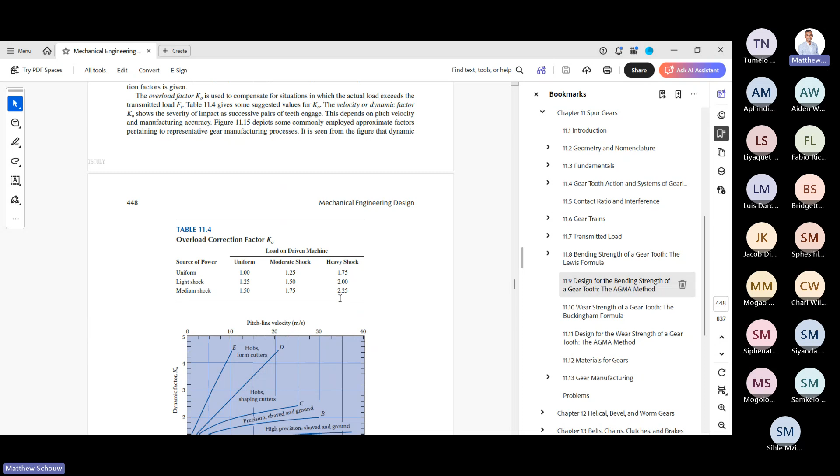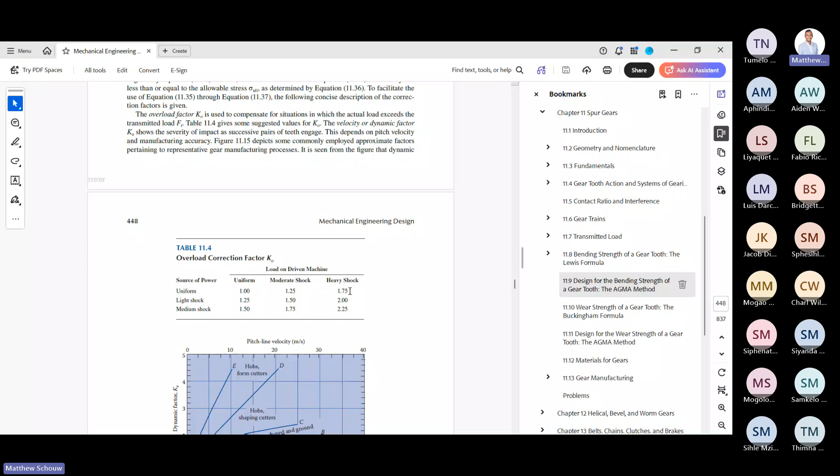So a lot of gear design is exactly like this: pulling tables, putting stuff in, not tough. KO, right? Did they stipulate our overload factor? Let's quickly look at the question, and they don't state anything. So we have a conveyor drive with heavy shock torsional loading. Heavy shock is a keyword, and therefore conveyor heavy shock should be around 1.75. Our KO is 1.75. Colleagues, are you with me? Can I get a yes? Yes. Okay, cool.

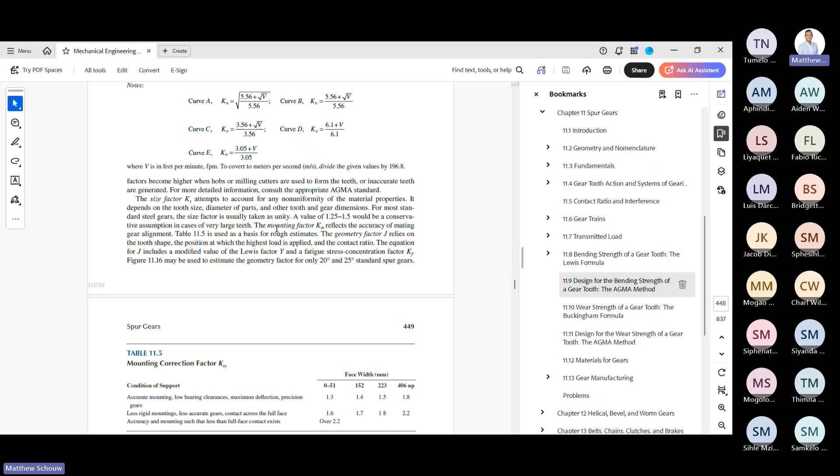And then our velocity factor, which is the dynamic factor, has to do with these ones over here. We need to look at these and see what is best. But first we need to find our velocity; that's also key. Based on our velocity, we'll then have a look. Let me just revert back to the question to see what they state for our velocity. Both gears are 300 Brinell steel.

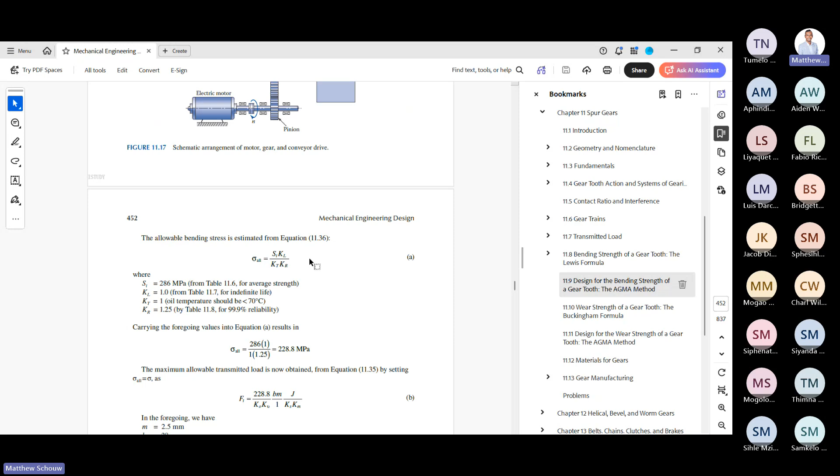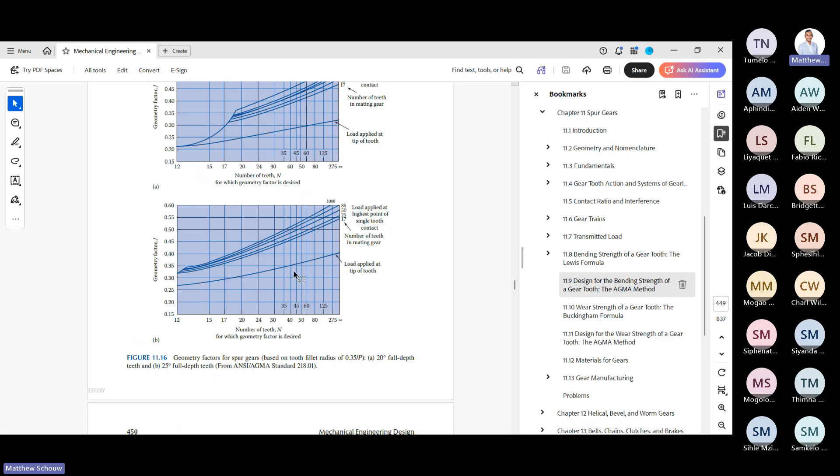And I'm just looking. Okay, let's just see, 300 Brinell steel. And based on that, okay, so what should be stated is high precision shaved and ground. That depends on the way it was manufactured, right? So I'm just going back. Does it tell us about how it is manufactured? No, right? So in this case, I mean, they surely should, but anyway, that makes it a bit tricky.

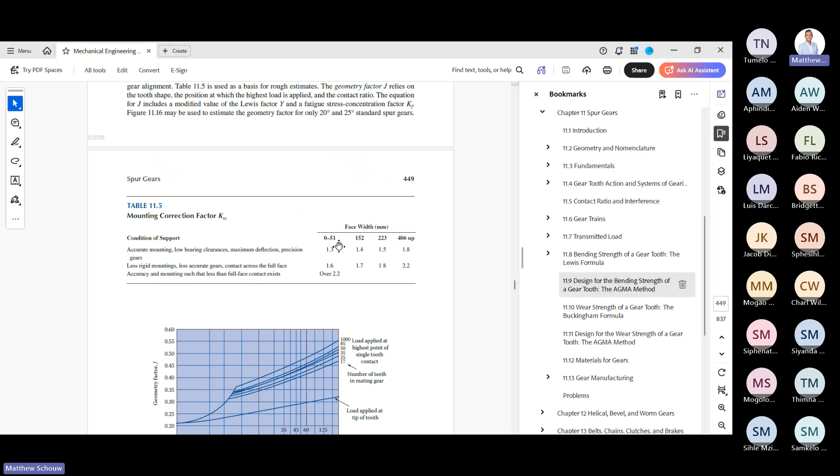Horsepower, yeah. So that's another assumption that we'll make, right? So we're going to have to assume. This should have been mentioned. This must be mentioned. In the exam, it will not be that unclear. So in this case, they're saying it's precision shaved and ground. So we're going to use curve C in our case. But I do want to make you aware,

also they say V is in feet per minute for these equations. And to convert to meters per second, we must divide the values given by, what is this? The 196 point. Yeah. So let's quickly, based on curve C, we're assuming, I'm going to write it down here. So I'm just finding our KO, which is given as 1.75. That is the heavy shock.

And then KV, I'm going to come back now to precision shaved and ground. Okay, I'll just say curve C rather. Curve C. I'm just getting the formula for you guys. So it's 3.56 plus root. And yeah, I think they're leaving it open because it's hard to exactly say. And this is why we keep this stuff for the projects, not for the exams. Okay, cool. So I'm going to end it off here with finding KV, and then you guys can do the rest.

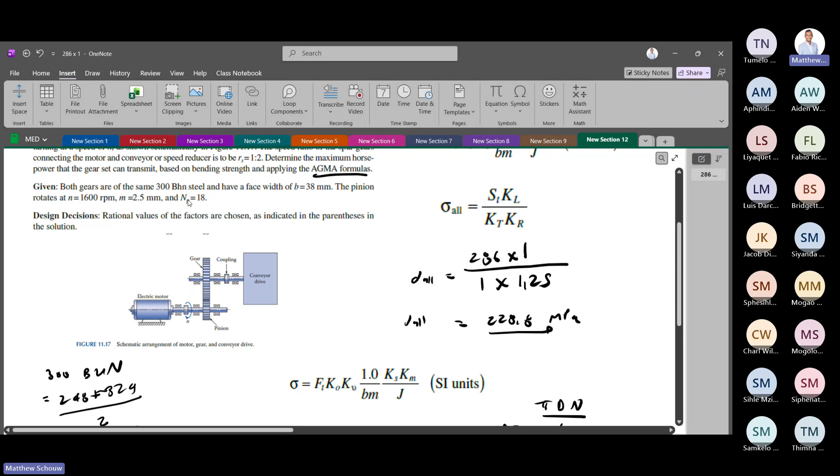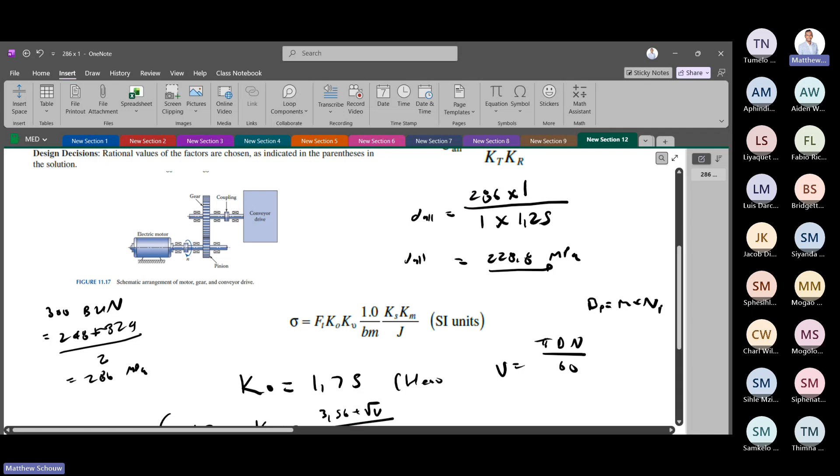Okay, so let's get our velocity, colleagues. Our velocity is pi d n over 60. And we can easily find that there. Module, number of teeth, we can actually get the diameter. So we know that your diameter will be equal to module times teeth. And that is going to be for the pinion, so NP, so that's DP. So that's going to be 2.5 times 18.

Hope you guys are with me. 2.5 times 18. I think a lot of people are uncomfortable that it's not specified. So we have 45 millimeters. And we can easily now find a velocity based on that. If you find the velocity, you should get 3.77 meters per second. And like I said, these equations work for feet per minute, right? And therefore we should times by 196.

Can someone just get me the KV value, please? So this must be converted into feet per minute, I believe. Can someone just give me that in feet per minute? What was it again? 3.77. Colleagues, are you guys still there? I think it's 742.13 now. 742.1. So we take that value and I believe we just put it in here. Okay.